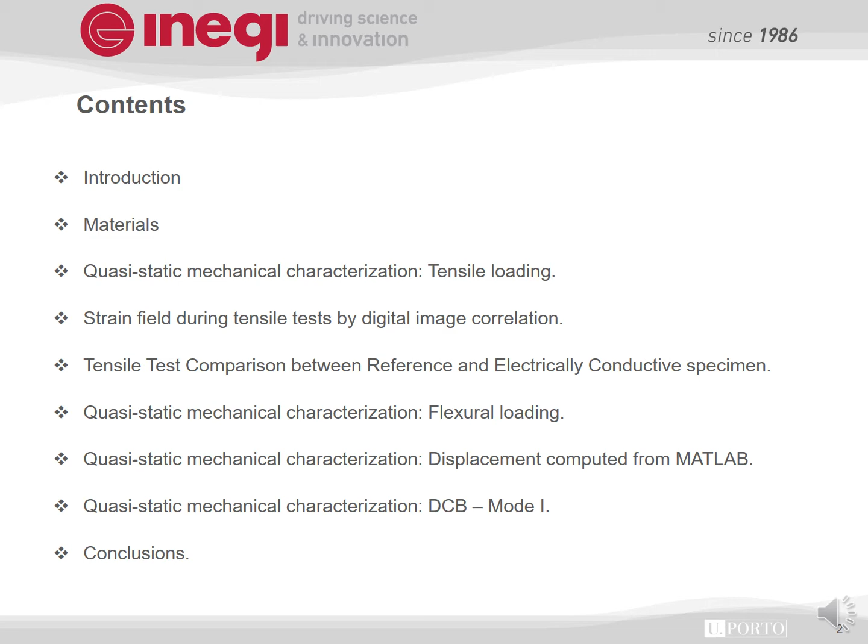The materials used for preparing the composite is AGMP 5232D T800 electrically conductive prepreg, which is a PAN-based carbon fiber from Toray. The electrically conductive specimen is manufactured by inducing the nanostructured particles using the functionalized interlayer technology. The unidirectional laminated composites with the 0-degree layup configuration are then prepared. The physical properties of the tape prepreg are shown in table 1, and in table 2 the mechanical properties of the prepreg are shown.

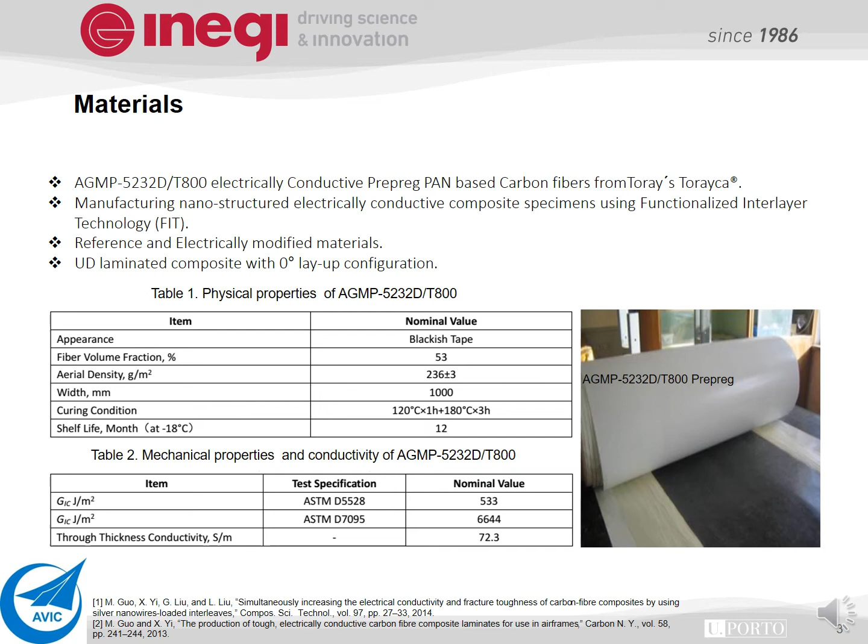Quasi-static mechanical characterization under tensile loading. Tensile tests were conducted on reference and electrically conductive specimens according to the test standard ASTM D3039. Dimensions of the specimen tested were 250 by 25 by 2.5 millimeters. A total number of 6 specimens were tested according to the test protocol. The graph on the left-hand side shows the tensile test result of the reference specimen, and the graph on the right-hand side shows the tensile test result of the electrically conductive specimens. Both results show consistency in terms of the maximum force, maximum strain, and the elastic modulus showed consistent values throughout the specimens.

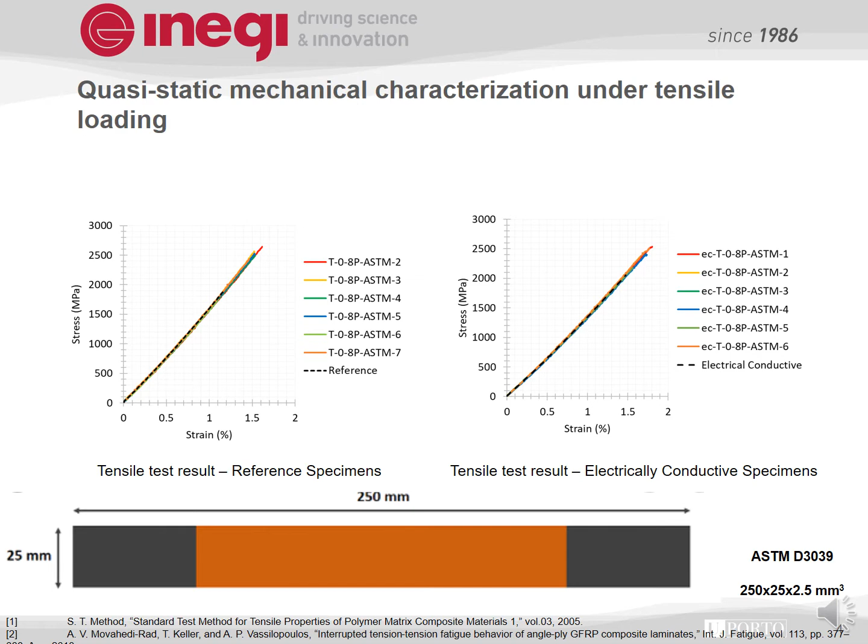Quasi-static tensile test comparison between reference and electrically conductive specimen. For comparing the reference and electrically conductive specimens, the average value of the specimens was taken. The figure shows the stress and strain graph. From the slope, the elastic modulus of the reference specimens can be seen to be higher than the electrically conductive specimen. Both specimens reached identical maximum stress, but the electrically conductive specimens can absorb more energy, as indicated by the maximum strain they can reach. Electrically conductive specimens seem to have higher toughness than the reference specimens.

The figure on the left-hand side shows the ruptured specimen at the end of the test after reaching the maximum strength. Specimens did not fail in the middle, but the fibers seem to be separated in the direction of the orientation of the ply. Each fiber bonded with the matrix seems to get separated after reaching the maximum tensile strength. Both reference and electrically conductive specimens seem to have the same failure behavior.

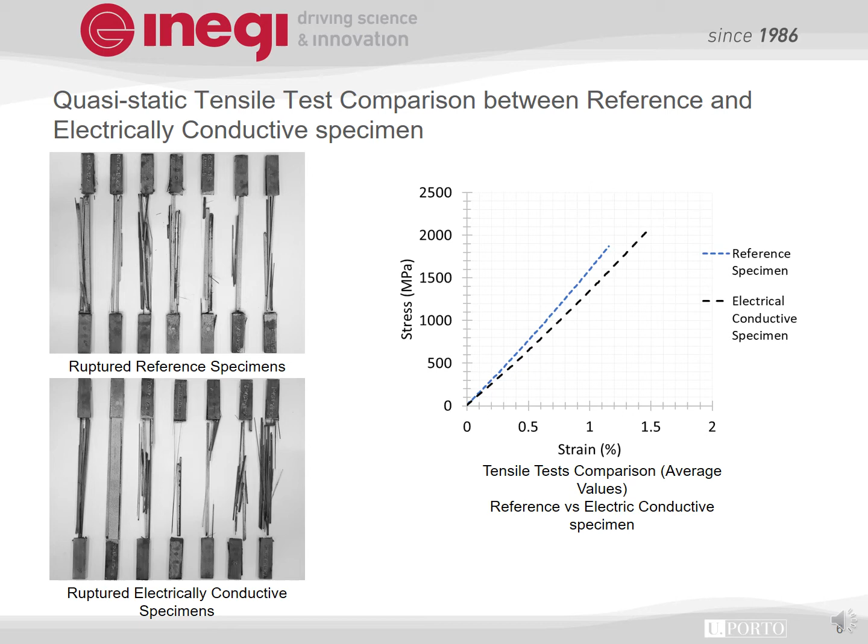Quasi-static mechanical characterization under flexural loading. Flexural tests were conducted on reference and EC, electrically conductive, specimens according to the test standard ASTM D790. Dimensions of the specimens were 140 by 25 by 2 mm as the length, width, and thickness of the specimens. A total of 5 specimens were tested according to the test protocol.

This standard utilizes a 3-point bending system as a simply supported beam, shown in the figure. Specimens rest on two supports and are loaded by means of a loading nose midway between the supports. A support span to depth ratio of 16:1 was used for setting up the 3-point bending system. The figure on the left-hand side shows the flexural test setup in the initial loading position, and the right-hand side shows the final loading position before failure.

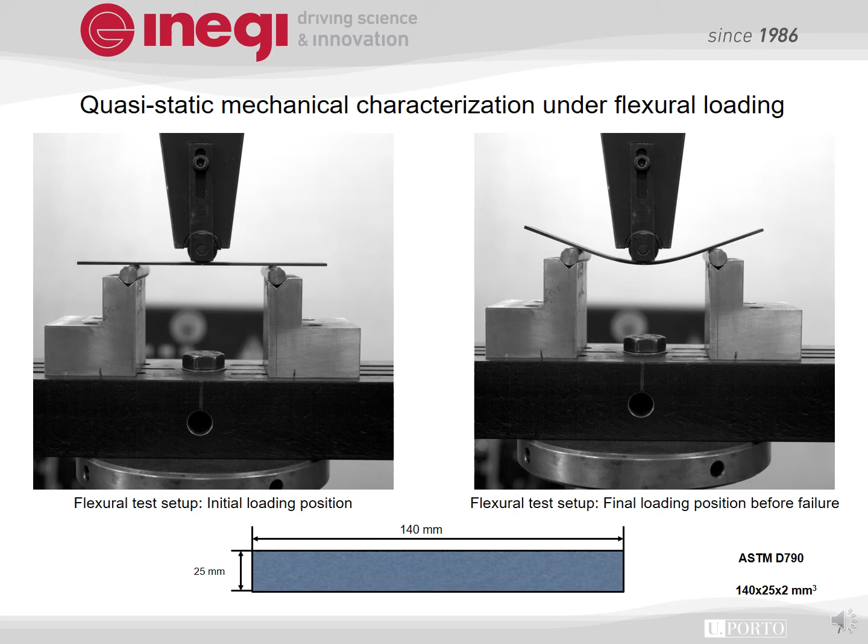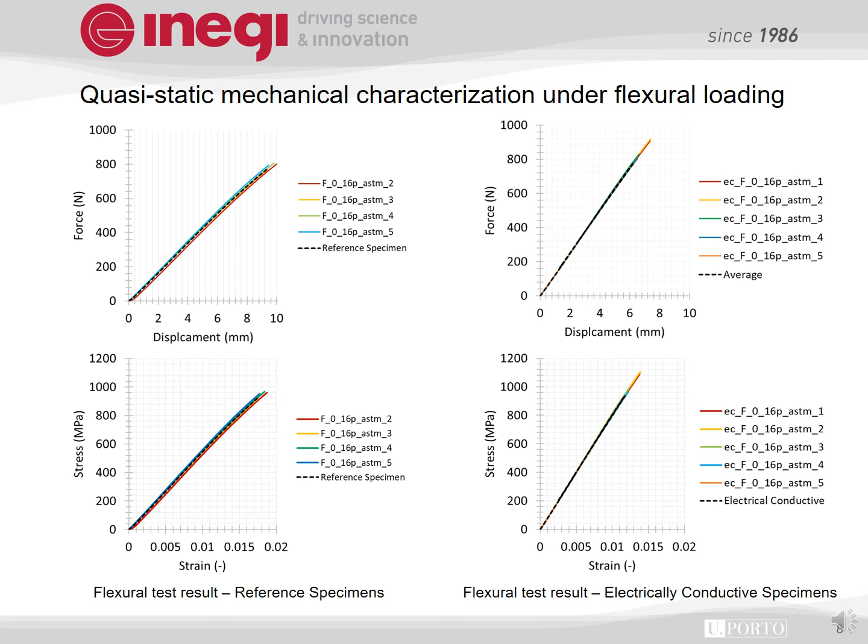Quasi-static mechanical characterization under flexural loading. Reference and electrically conductive test specimens were tested using the test method described. All the test specimens showed reproducible results. Total energy absorbed by each specimen was equivalent, as seen from the area under the curve of the force-displacement graph. The graph on the left-hand side shows the result from the reference specimen, and the right-hand side shows the electrically conductive specimens.

Quasi-static mechanical characterization, contactless computation. Here displacement is calculated from the movement of the support of the beam by using a MATLAB program. The MATLAB program computes the displacement of the tool during the test. It calculates the displacement of the right side tool and then the displacement of the left side tool, and then compares it with the experimental data.

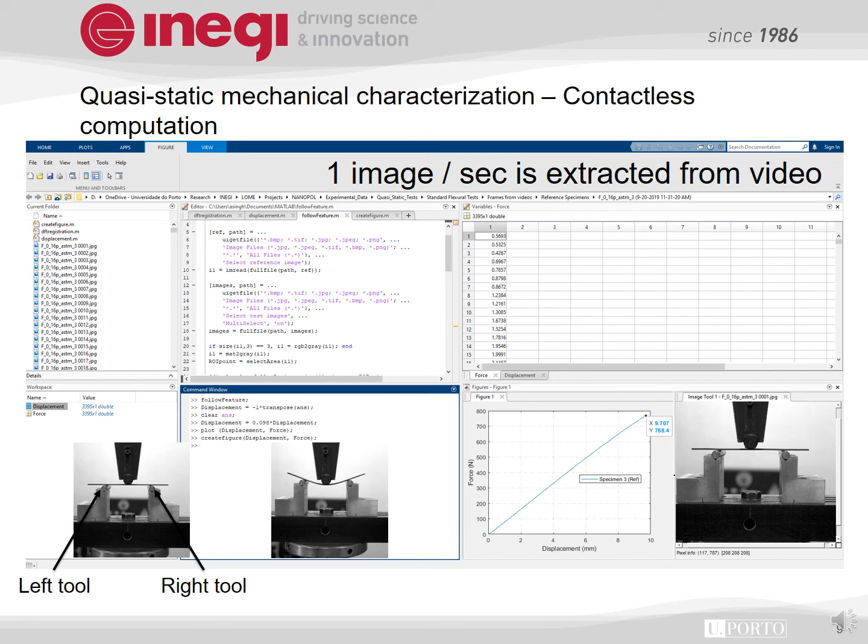Displacement of the left support and the right support is compared with the experimental data in these figures, and they all are found to be in conjunction and are well placed, as can also be seen by the coefficient of determination.

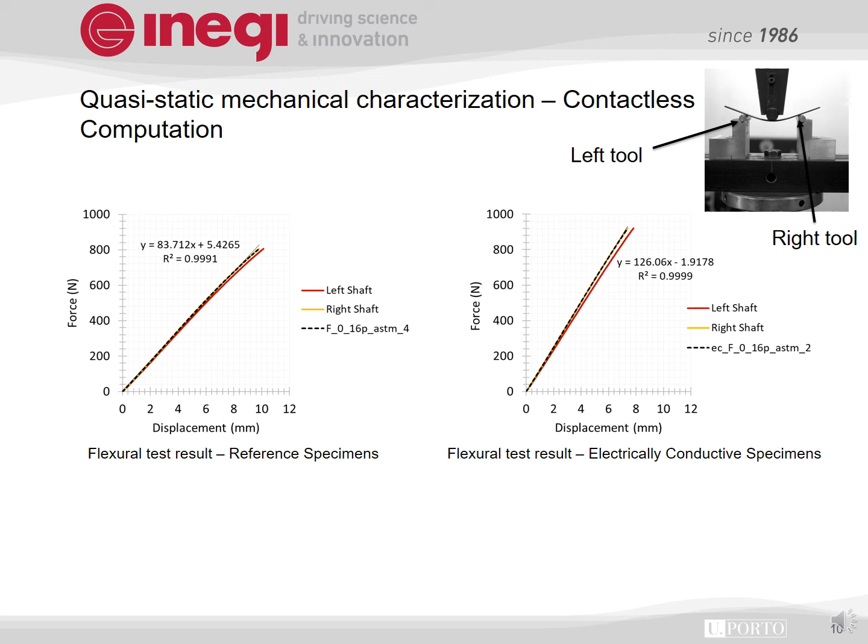Quasi-static flexural test comparison between reference and electrically conductive specimen. For comparison, specimens which absorbed maximum energy for reference and electrically conductive specimens were chosen. From the figure, electrically conductive specimens have higher energy absorbed when compared with the reference specimens. The figure shows that electrically conductive specimens reached higher flexural strain and higher tangent modulus as compared to the reference specimen. However, both the reference and electrically conductive specimens have similar flexural stress values.

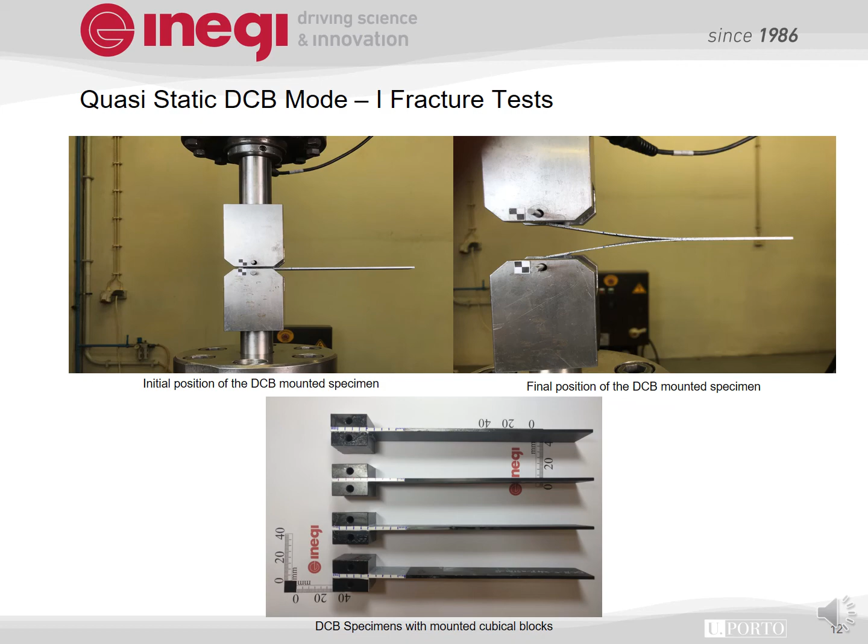Conclusions: for the tensile test, the elastic modulus of the reference specimen was found to be higher than the electrically conductive specimen. Both specimens reached identical maximum stress, but the electrically conductive test specimen absorbed more energy, as we saw from the maximum strain, as the electrically conductive specimen can reach higher values of strain. Thus, these electrically conductive specimens have higher toughness than the reference specimen.

For the flexural test, the electrically conductive test specimen reached higher flexural strain and higher tangent modulus as compared to the reference specimen, but both the reference and electrically conductive specimens have similar flexural stress.